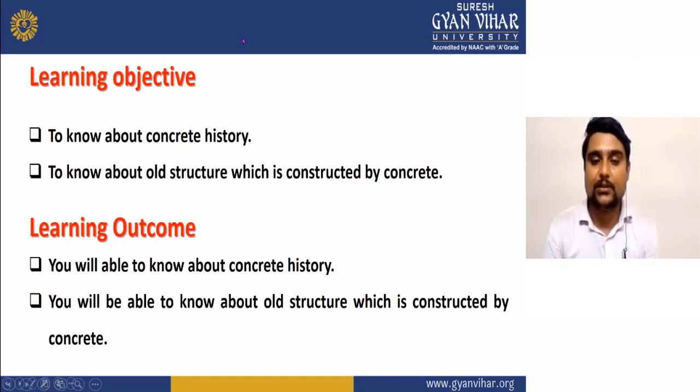First point is concrete. If you are doing any civil engineering course, like BTech or diploma in civil engineering, you should know the exact definition of concrete. The word concrete originated from the Latin word concretus, which means to grow together. Many times we also call something hard concrete.

And everyone knows concrete is the second largest consumed material in the world after water. People are consuming water, and after that the second consumed material is concrete. Anywhere you go, you will see concrete structures, because without concrete any kind of structure is not possible.

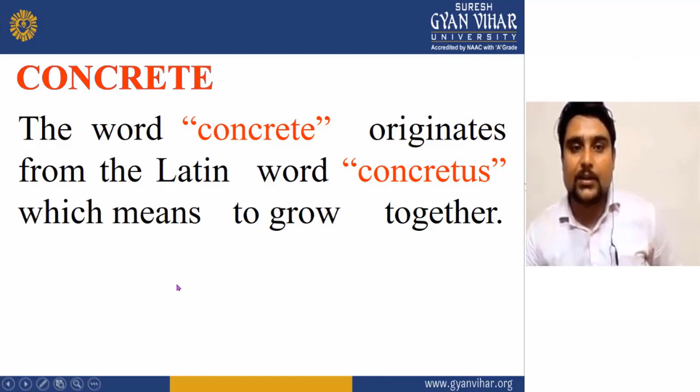Now we will see the exact definition of concrete. Concrete is a composite material in which a binding material is mixed with water with well-graded fine and coarse aggregate. What is the meaning of composite material? Concrete is prepared from other materials. When we mix sand, cement and aggregate together, we get concrete. That's why concrete is a composite material.

These materials are mixed through water. When you add water with the cement, sand and aggregate, you get concrete. What is the meaning of binding material? Binding material is the material which can bond coarse aggregate and fine aggregate together. Here we are using cement as the binding material.

That's why we say concrete is a composite material of binding material mixed in water with well-graded fine and coarse aggregate. As fine aggregate we are using sand, and as coarse aggregate we are using aggregate, and they bind together with the help of cement and water.

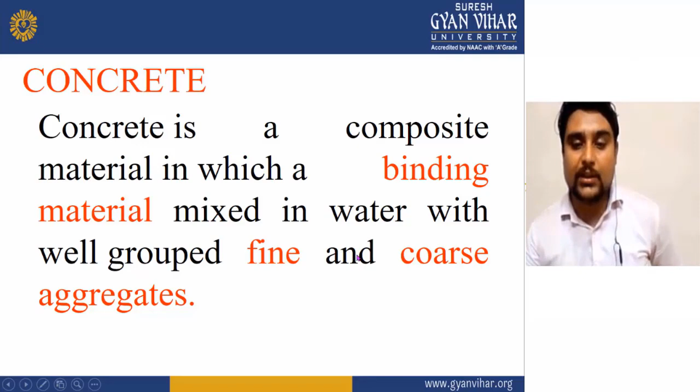What is the history of concrete? Before knowing anything, you should also know about the history of that thing, because history is very important. If anybody asks you what is the history of concrete, then you can easily answer it.

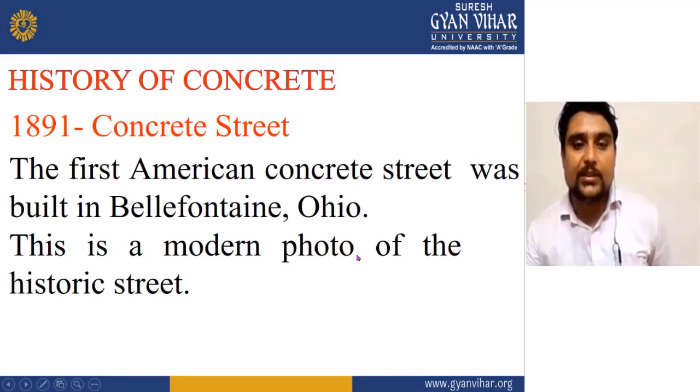The first American concrete street was built in Bellefontaine, Ohio. This is a modern photo of the historic street. In the next frame, you will see the picture of the first concrete street, which was built in 1891, and it is also called Concrete Street. It means concrete was first used in 1891, in Bellefontaine.

The first concrete home was built in 1908, as you can see here. Thomas Edison designed and built the first concrete home in Union, New Jersey. These homes still exist today. As you can see here, from 1908 we have been using concrete, and we built the first concrete home in Union, New Jersey. New Jersey is a state of the United States, as you all know. And these homes still exist today.

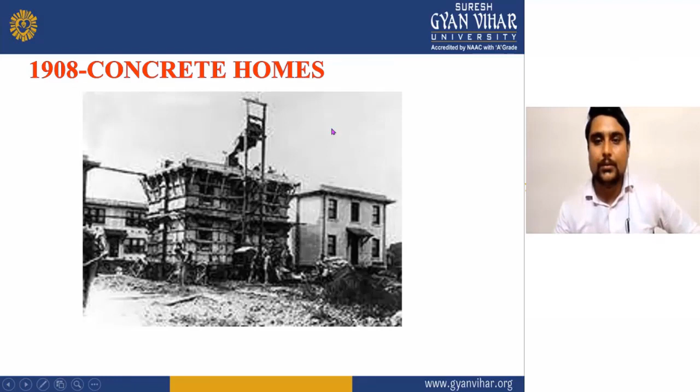And this is a very big thing, because it is more than 100 years, and those homes still exist. This is a very big thing. It means the life of concrete is very long. You can also see the picture of the homes which were built by Thomas Edison, as mentioned here, and this is the picture of that home.

Everyone has heard about the Hoover Dam. Hoover Dam is a very popular dam which everybody knows or has seen in the movies. In 1936, the Hoover Dam was built along the Colorado River, bordering Arizona and Nevada. It was the largest scale concrete project ever completed.

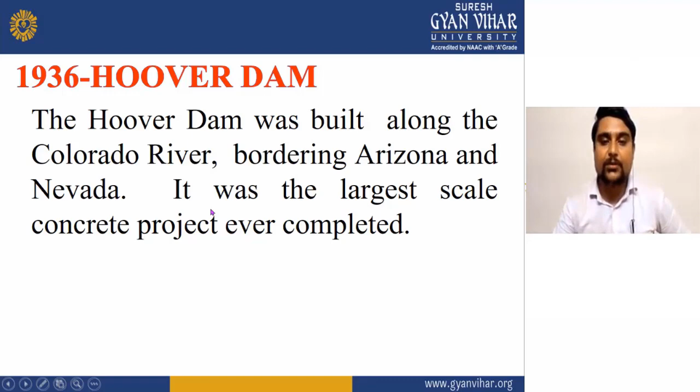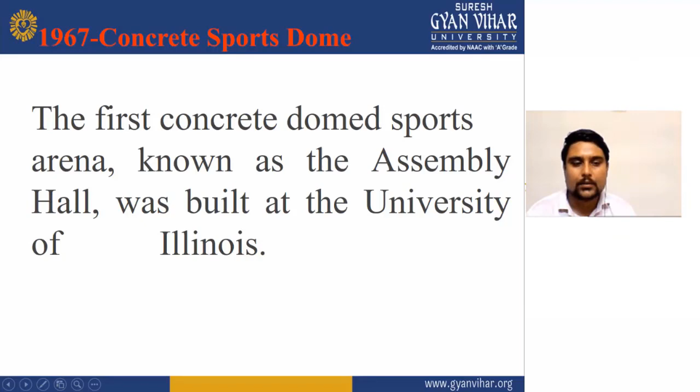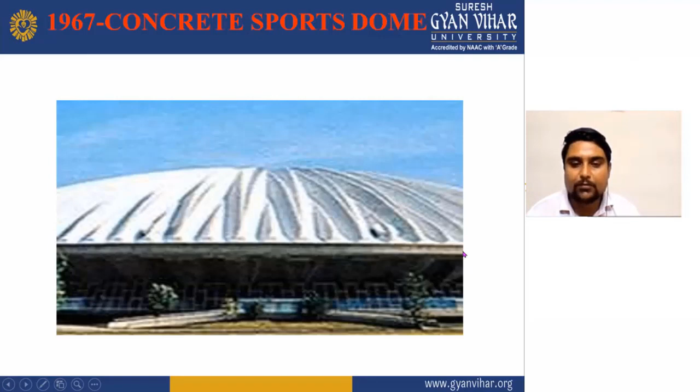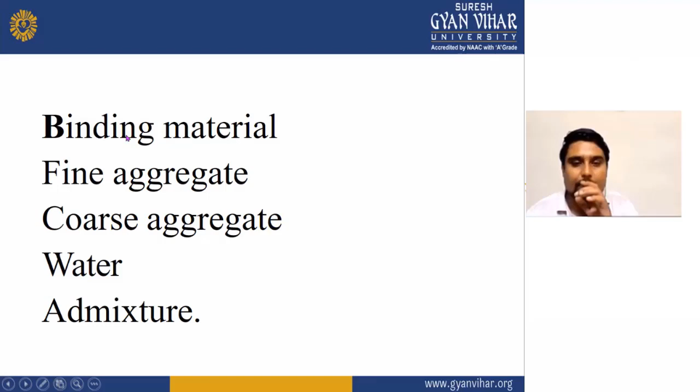This slide is about the ingredients of concrete. As you can see here, in concrete we use a binding material. The binding material may be lime or cement. What is the meaning of binding material? I told you earlier, binding material means something which can bind two things together. That's why that material is called binding material. In concrete, the binding material may be cement, and it may also be lime. In old times we were using lime as the binding material.

If you see an old structure like a fort, the stones are bound together with lime. So lime was also a binding material, and we did some invention, some research, and we modified lime into cement. The alternative to lime is cement. The others are fine aggregate, coarse aggregate, water and admixture. In fine aggregate we use fine material. We can use sand, cinder, and we can also use lime and fly ash.

These are the fine aggregates, meaning material whose size is small; that we call fine aggregate. Coarse aggregate means the size of the material is big; that's why we call it coarse aggregate. Then water and admixture. Admixture is a different thing. It is not necessary to add admixture to your concrete. What does admixture do? Admixture can modify the properties of concrete.

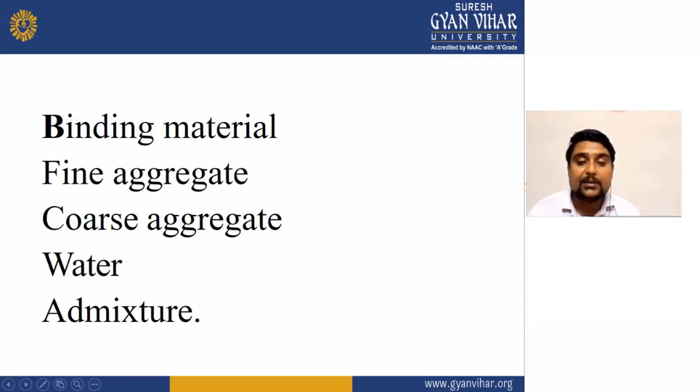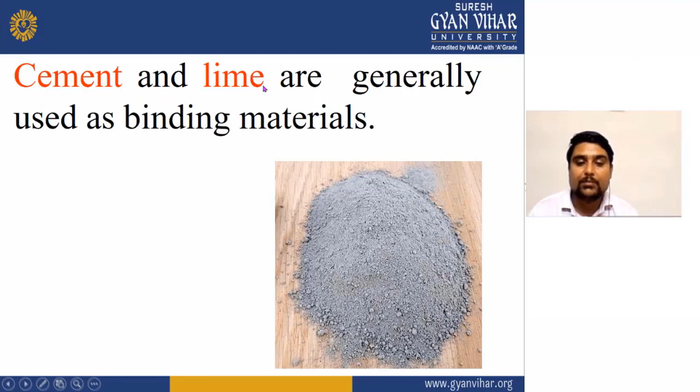Cement and lime are generally used as the binding material. Now you can see the picture of cement, and here also mentioned lime. Lime is also a binding material.

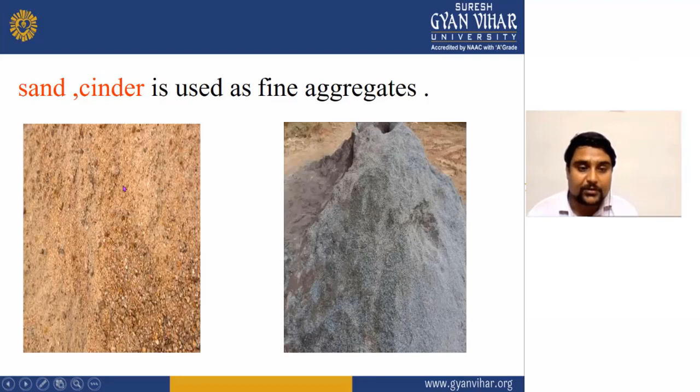Sand and cinder are used as fine aggregate. You can see here sand we are using also as fine aggregate, because the size of sand is very small. That's why we count it in the fine aggregate, we cannot count it in the coarse aggregate.

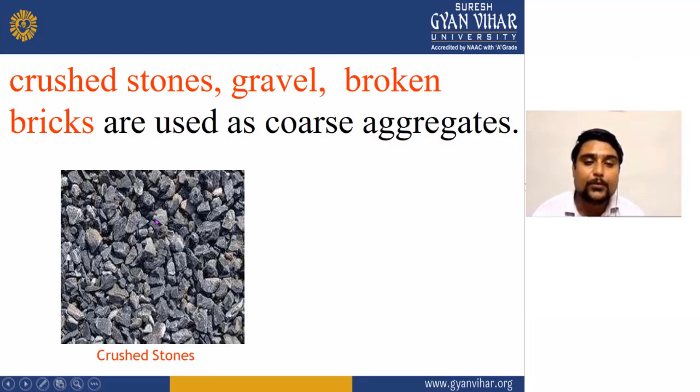What will be the coarse aggregate? As you can see in the picture, the size of these materials is bigger than fine aggregate, that's why we call it coarse aggregate. Crushed stones, gravels, broken bricks are used as the coarse aggregate. These are the pictures of the coarse aggregate, as you can see here.

Now we will see some properties of concrete. Freshly prepared concrete, till it has not set, is called wet concrete. Because when we mix cement, sand, water, and aggregate together, it will be in the form of liquid. It will be called wet concrete, as you can see here.

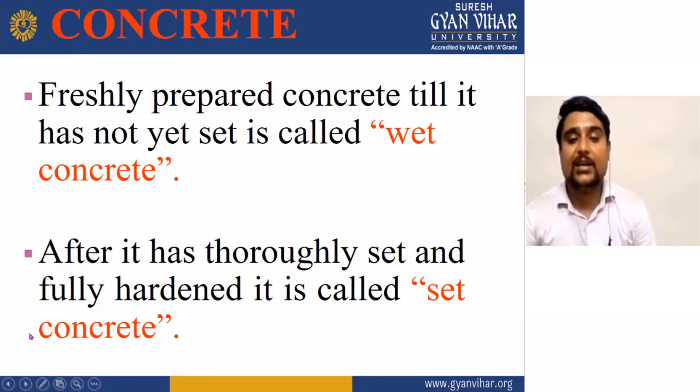Mixing of the concrete, as you know, is also a very important thing you should know about. Nowadays, a lot of people are using concrete, mixing concrete with the help of machine. That is called machine mixing.

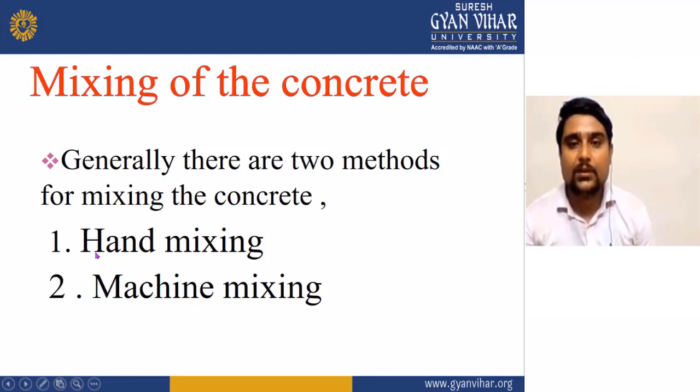There are two methods of mixing, as you can see here. In machine mixing, it will take less time. In hand mixing, it will take long time. The accuracy of material weighing is very fine with machine mixing, and the accuracy of material with hand mixing is not very good.

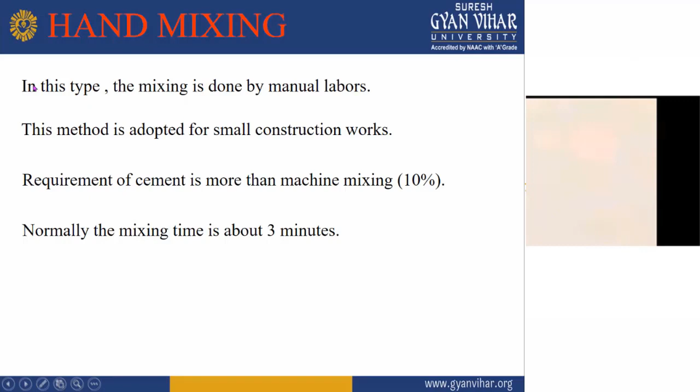Now we will see the hand mixing. In this type, the mixing is done by manual labor, as I told you earlier. This method is adopted for small construction work, meaning by using hand mixing you cannot do work on a very big structure, that's why you have to do it for small work.

There is also a requirement of cement that is more than machine mixing, approximately 10%. This is a very important thing which you need to know, many times in exams, MCQ exams, this question came: if you are mixing with machine versus mixing with hand, where do you have to use more cement? In hand mixing, you have to use more cement, more than 10% compared to machine mixing.

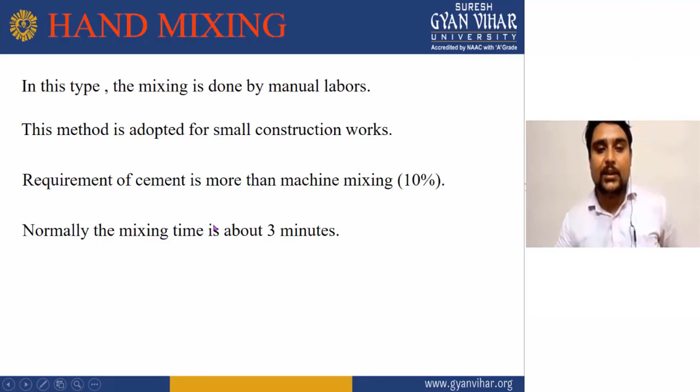Normally the mixing time is about 3 minutes. When you do the hand mixing, you have to finish your mixing within 3 minutes, otherwise your concrete will start being hardened. That's why you have to finish all the work within 3 minutes.

Construction of platform of bricks, lean concrete, or iron sheet, where you can use hand mixing. You can see here the construction of platform of bricks, lean concrete, or iron sheet.

Spread out sand evenly, spread cement on it, and mix it till the color mixing becomes uniform. Spread the mixture and spread coarse admixture, then mix it. During the mixing, the remaining water should be added in a continuation process. Time for the mix is generally 2 to 3 minutes.

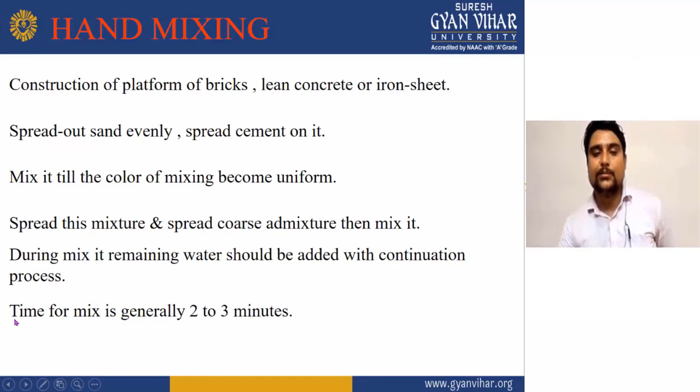Now we will see machine mixing. This is similar to hand mixing, only the mixing is carried out in a rotating drum. As you can see here, rotatory is a different thing and rotating drum is a different thing. As you can see here, we are using a rotating drum.

What we have to do is fill cement, sand, and water here, and then we get the concrete, as you can see here. First, you have to put the aggregate, then sand, then cement, and after that you have to put water in this drum, and it will rotate approximately 30 to 35 rounds, and then your concrete will be fully mixed. If you want to add an admixture, you can add it during the rotation of this drum.

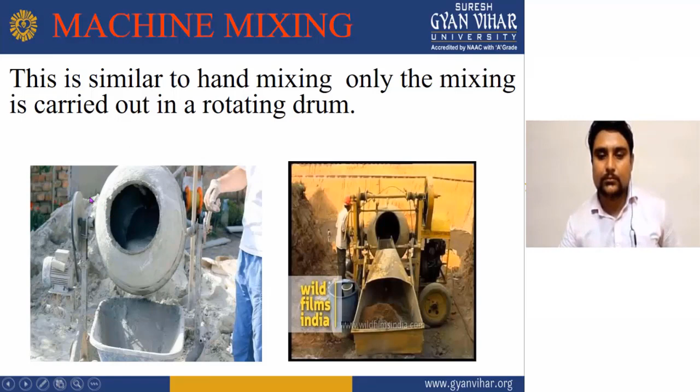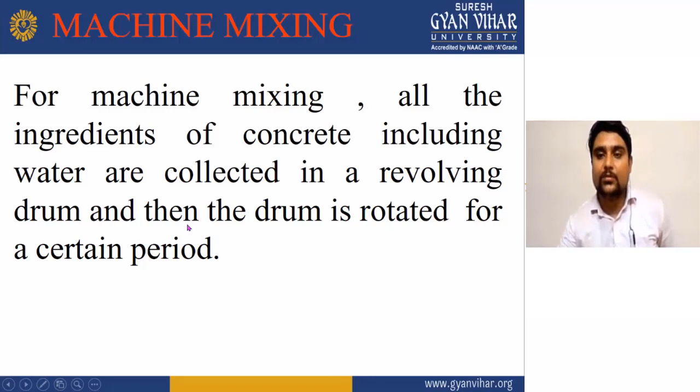Machine mixing: for machine mixing, all the ingredients of concrete including water are collected in a revolving drum, and the drum is rotated for a certain period. In machine mixing, there is also a ready mix concrete, which we call a ready mix plant, RMC plant.

Ready mix concrete is a type of concrete that is manufactured in a factory or batching plant according to the design, and then delivered to the work site by transit trucks. It is manufactured under computer controlled operation and transported and placed at the site of construction.

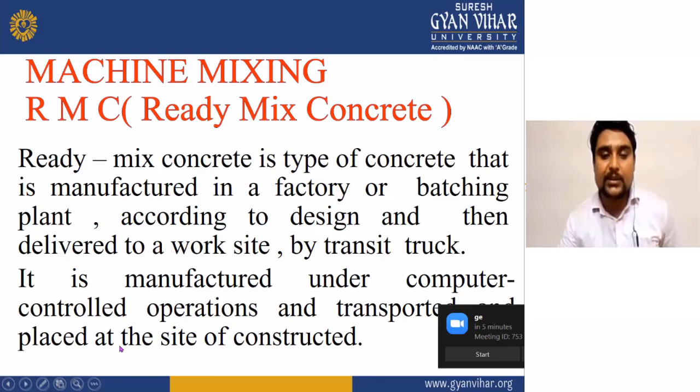What is the advantage? If you do one mixing by hand and one mixing by machine, definitely you will get a good result by machine mixing, because machine mixing will be done properly, as there will be a weighing machine also. When you put the material on it, it will calculate how much quantity of cement, how much quantity of sand, and how much quantity of water you have to use for your concrete. That's why it is better than hand mixing.

What will be the advantages of ready mix concrete? We will see here: better quality concrete is produced, storage space for basic material at the site is not required, and wastage of basic material is avoided.

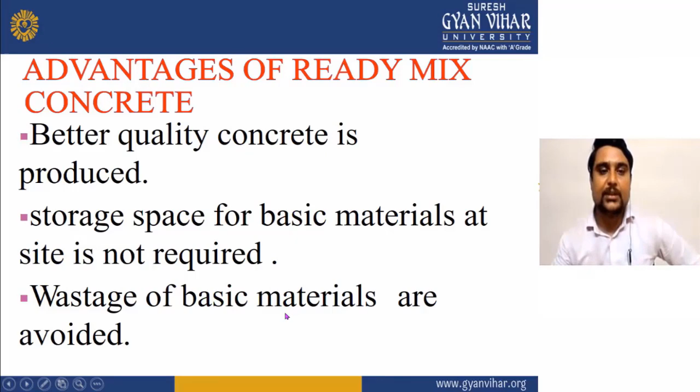After watching the video, I think you have got a very good idea about ready mix concrete. Now we will see the advantages of ready mix concrete. First, you will get better quality concrete which will be produced, and storage space for the basic material at the site is not required, meaning you do not need to worry about storing cement, sand, and aggregate. And wastage of basic material is avoided, meaning wastage will be very negligible, because all concrete will be mixed together and there will be no much time for putting cement on the site. That's why there are many advantages of ready mix concrete, as you can see here.

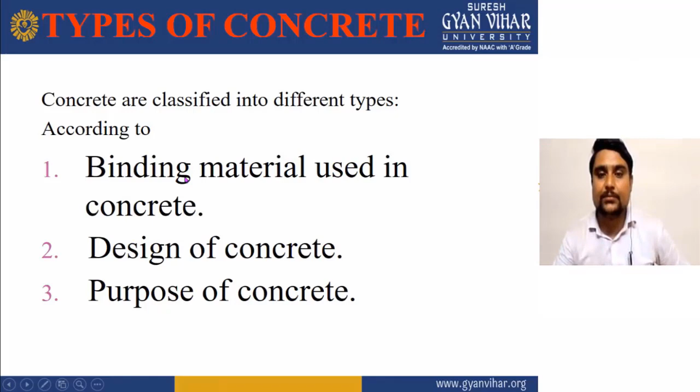First, we will see the classification according to the binding material. The first one is cement concrete and the second one is lime concrete. As I told you earlier, it depends on the binding material; we are using cement and lime also. That's why it is categorized into two parts: first due to cement and second due to lime.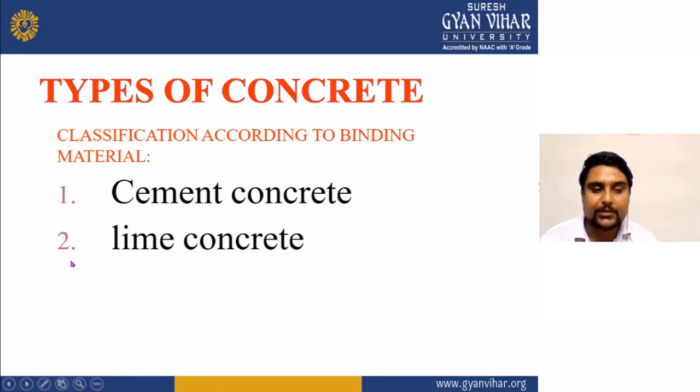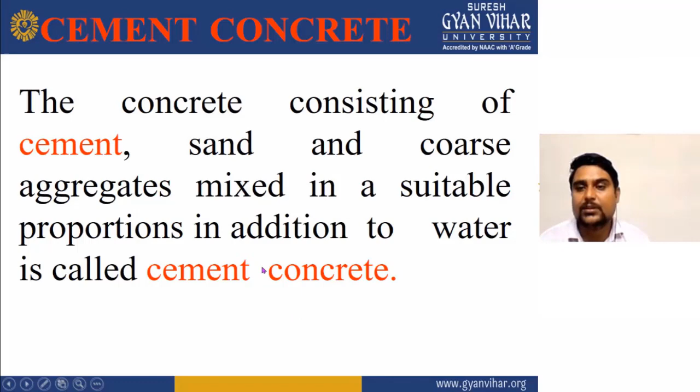Cement concrete consists of cement, sand, and coarse aggregate mixed in suitable proportion in addition to water, and this is called cement concrete. What we have to do is take the cement, sand, aggregate, and use a suitable quantity of water with these materials, and then we get the cement concrete. This cement concrete is generally used for the building of any construction activities.

Cement concrete is a type of concrete where cement is used as a binding material, sand as fine aggregate, and gravel or crushed stone as coarse aggregate. In lime concrete, we use lime in place of cement.

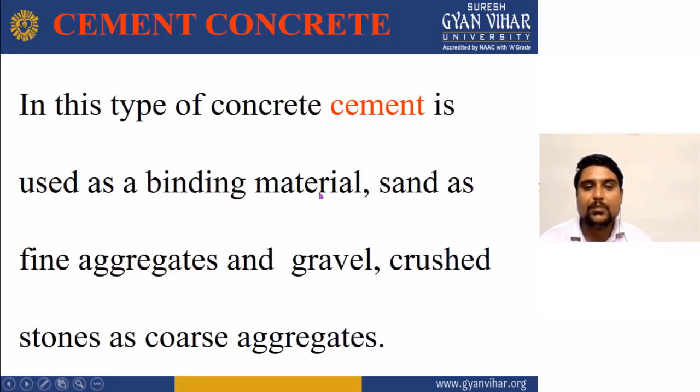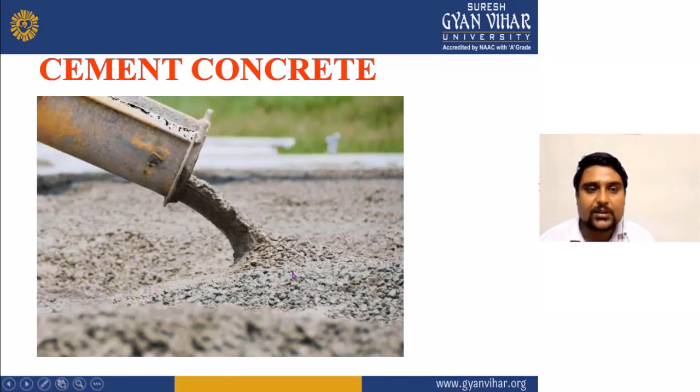As you can see in the photograph, cement concrete is prepared using cement as a binding material. Cement concrete is commonly used in buildings, roads, dams, and other important engineering work where strength and durability is of prime importance. Where you need good strength and good workability, you can use cement concrete, because the strength is not like other concretes. That's why we use cement concrete where we need more strength, more durability, and more lifespan of the structure.

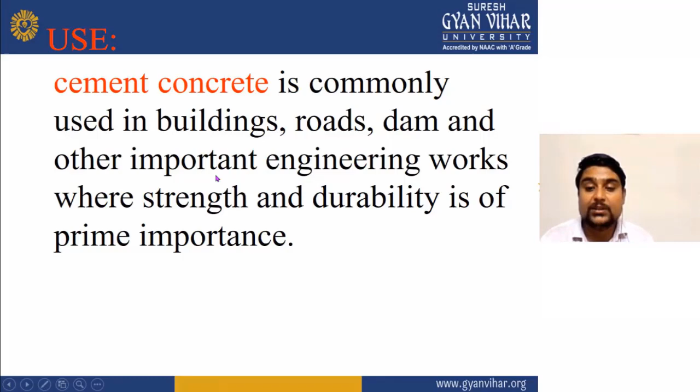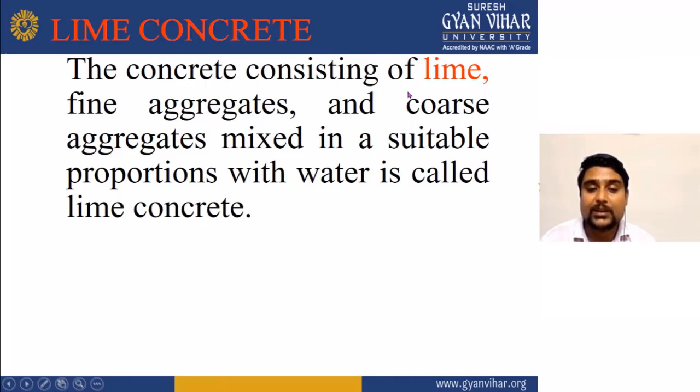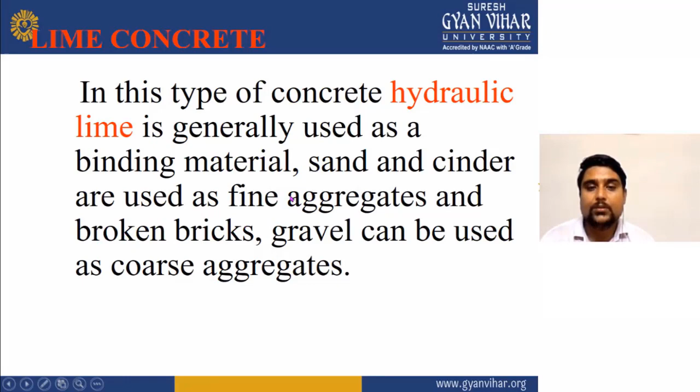Let's come to lime concrete. Concrete consisting of lime, fine aggregate, and coarse aggregate mixed in suitable proportion with water is called lime concrete. Here lime is highlighted in red color, meaning we are using lime in place of cement. In this type of concrete, hydraulic lime is generally used as a binding material. Sand and cinder are used as fine aggregate, and broken bricks or gravel can be used as coarse aggregate.

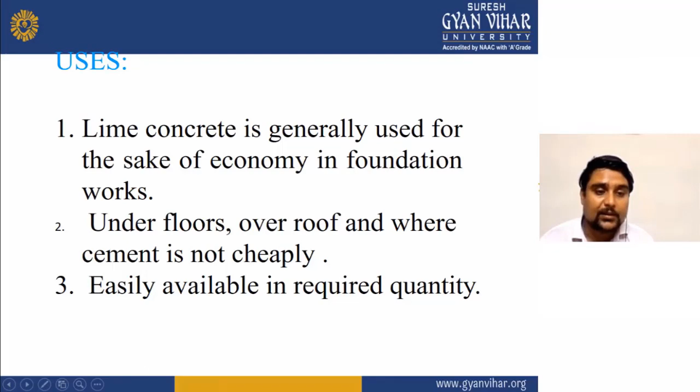What are the uses of lime concrete? Lime concrete is generally used for the sake of economy in foundation work, under floors, over roofs, and where cement is not cheaply or easily available in the required quantity. Meaning if you want to make your structure economical, there you can use lime concrete. This is the photograph of lime concrete.

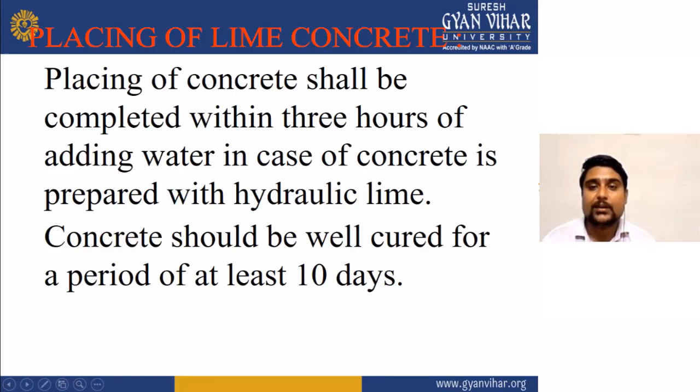One important thing: placing of lime concrete shall be completed within 3 hours of adding water. In case the concrete is prepared with hydraulic lime, the concrete should be well cured for a period of at least 10 days. Now we will see MCQ questions on concrete.

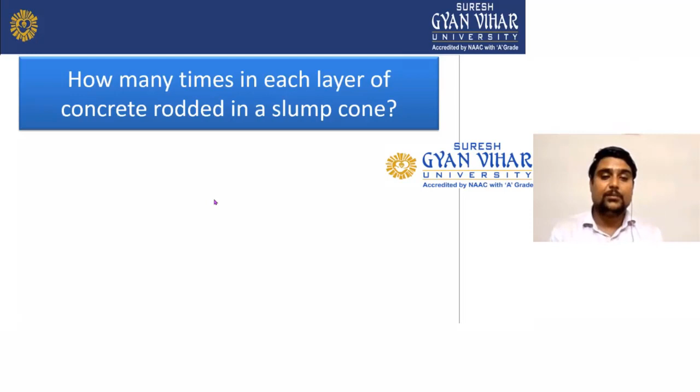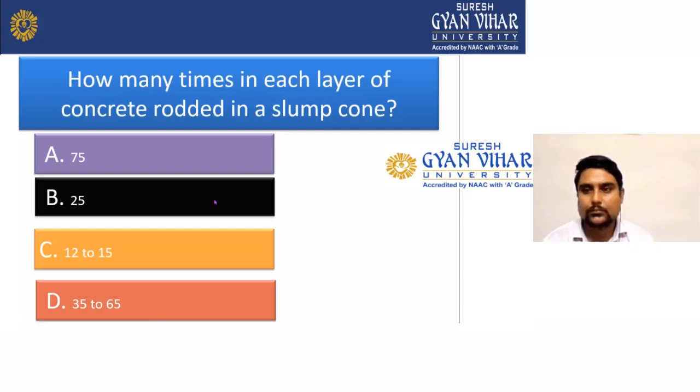First question: how many times is each layer of concrete rodded in the slump cone? There are four options: A is 75 times, B is 25 times, C is 12 to 15 times, and D is 35 to 65 times. The right answer will be 25 times.

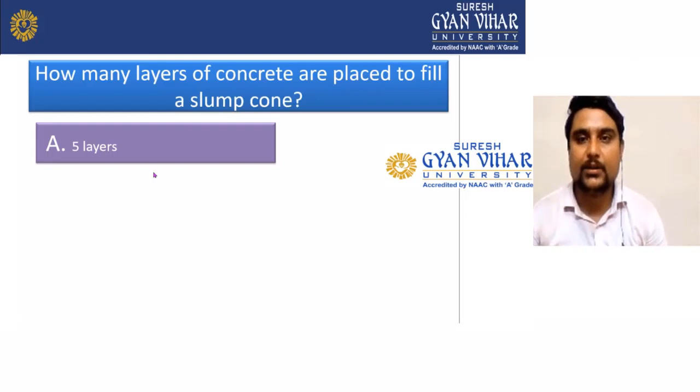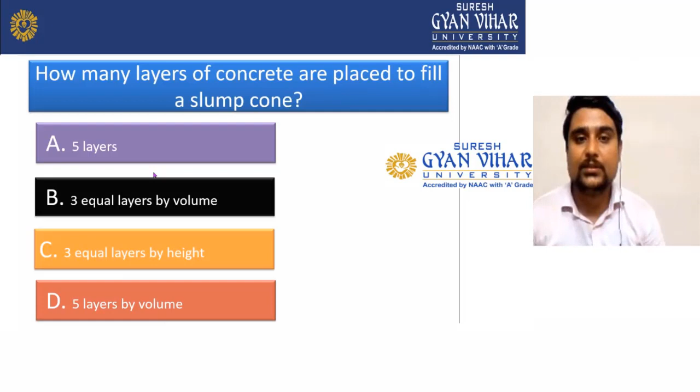Second question: how many layers of concrete are placed to fill the slump cone? First option is 5 layers, second is 3 equal layers by volume, third is 3 equal layers by height, and fourth is 5 layers by volume. The right answer will be B.

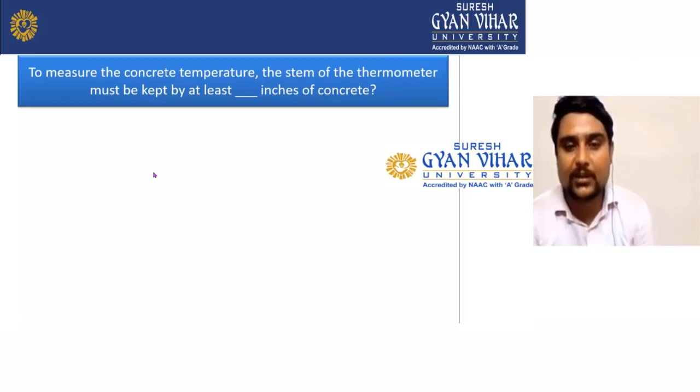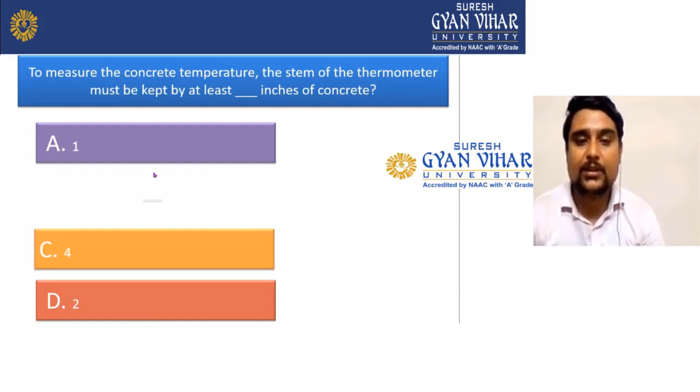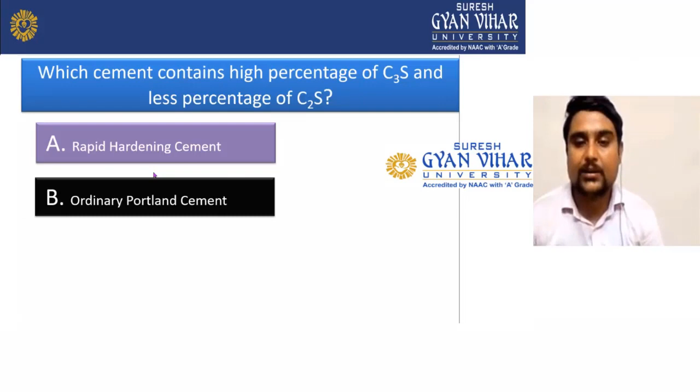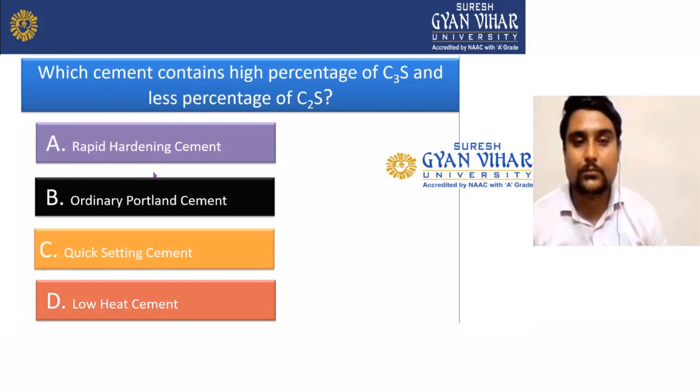Which cement contains a high percentage of C3S and less percentage of C2S? Options: first is rapid hardening cement, second is ordinary Portland cement, third is quick setting cement, and fourth is low heat cement. Rapid hardening cement will be the right answer. In rapid hardening cement, there is a high percentage of C3S, called tricalcium silicate, and less percentage of dicalcium silicate, compared to ordinary Portland cement.

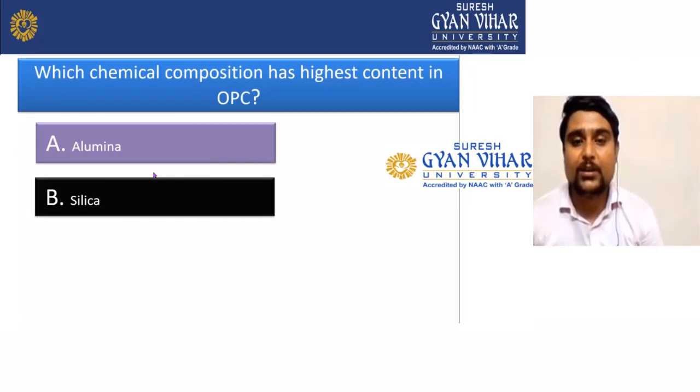Next question: which chemical composition has the highest content in OPC? Options are alumina, silica, lime, and iron oxide. The question is asking which chemical composition has the highest content in OPC, meaning which component will be more in your OPC. Let's see.

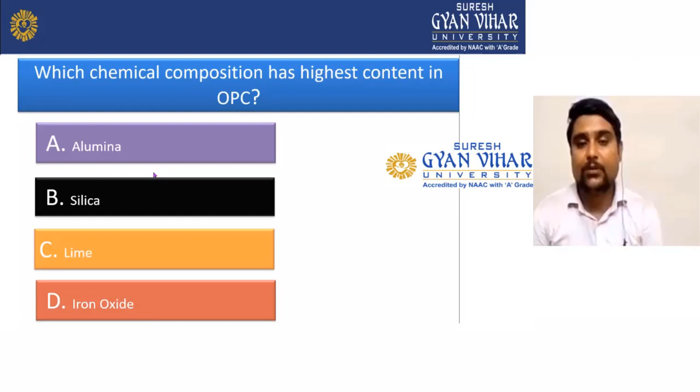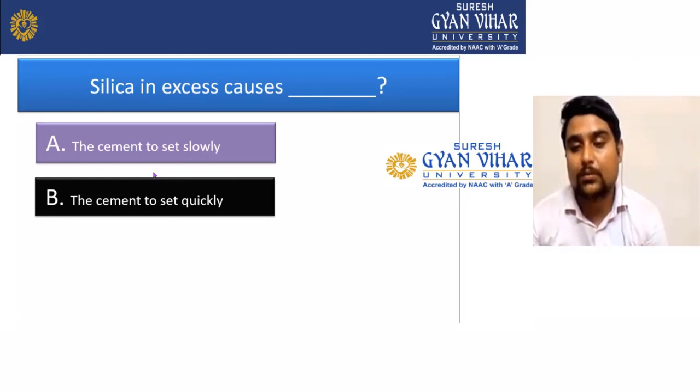Right answer will be here lime. As you can see here, lime is your right answer. Come on the next question. Silica in excess causes? If silica will be in more quantity, what will happen in your cement? See, the cement will set slowly. Second option is the cement to set quickly. Fourth option is the cement to expand.

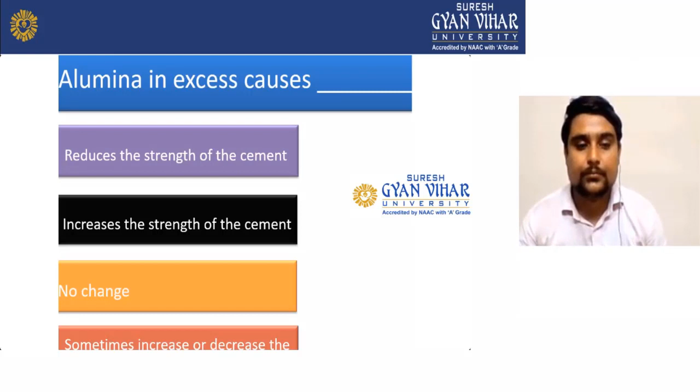In the next question, it is asking alumina in excess causes. What will happen if alumina will be in excess quantity? First, reduce the strength of the cement. Second option will be increase the strength of the cement. C option is no change, and D option is sometimes increase or decrease the strength of the cement. And here answer A will be your right answer. Reduce the strength of a cement. Okay.

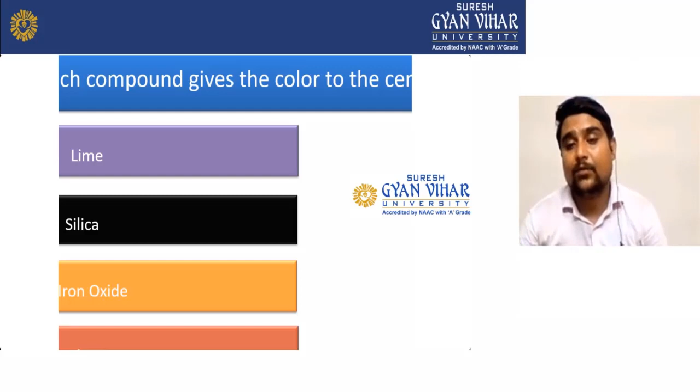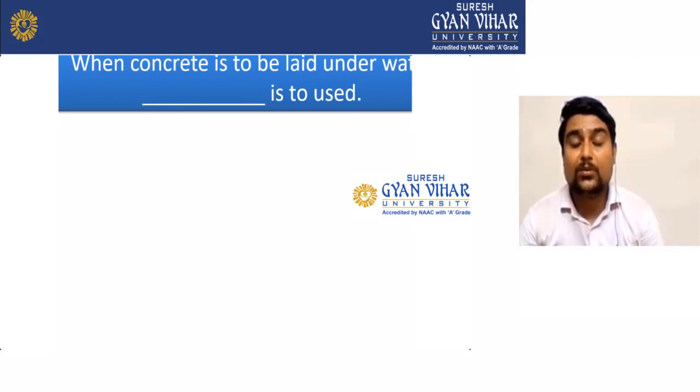When concrete is laid under water, it is to use rapid hardening cement, ordinary Portland cement, quick setting cement, and low heat cement. Which cement we have to use underwater? This is the question. And here we have to use quick setting cement, because quick setting takes very less time for the hardening. That's why we always use quick setting cement in underwater construction.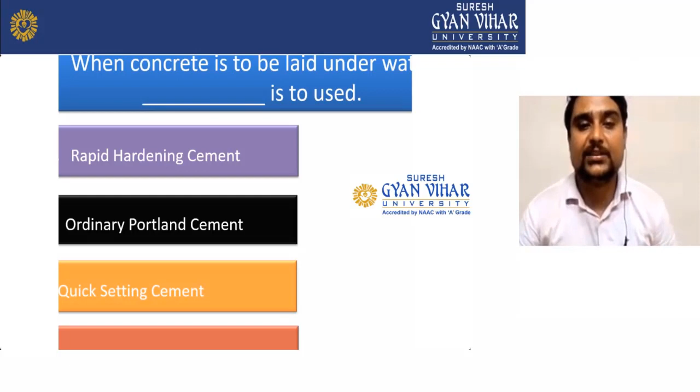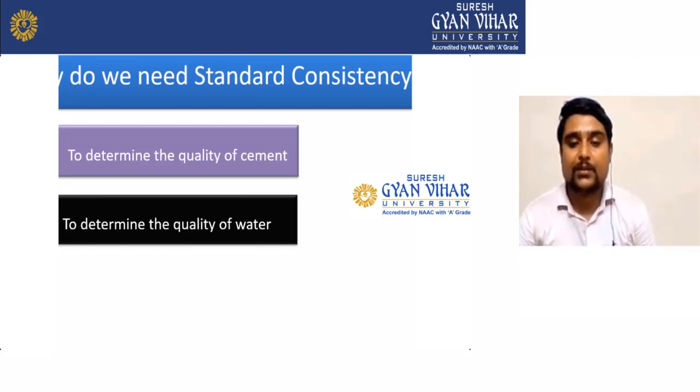Why do we need standard consistency test? Why we perform the standard consistency test? Here you can see, to determine the quality of the cement. Second option is to determine the quantity of the water. This is not quality, this is quantity. To determine the quality of the mixed concrete. And fourth answer is to determine the strength of the concrete block. Here it will be to determine the quantity of the water, because with the help of standard consistency test we,

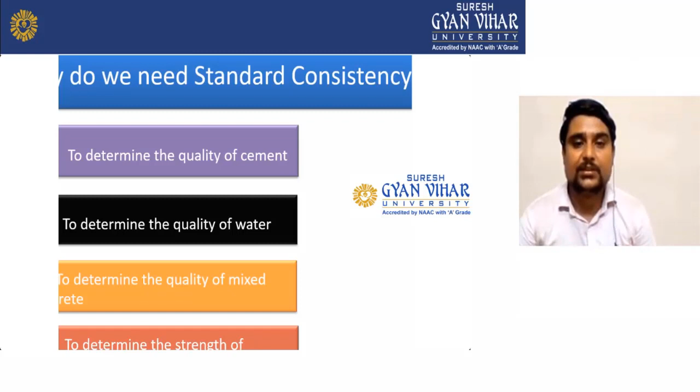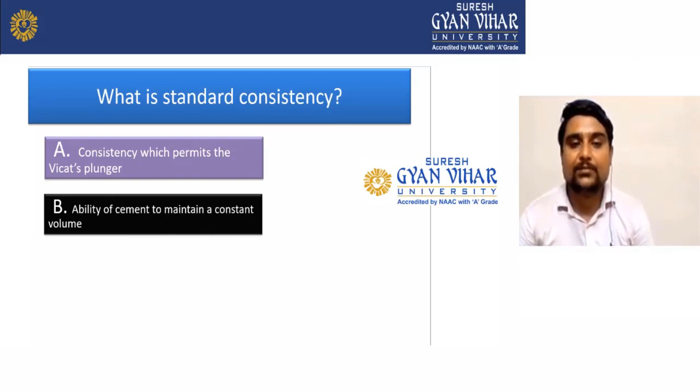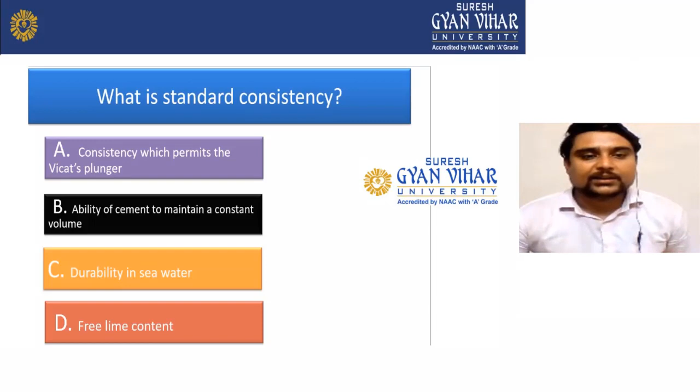What is standard consistency? You have to tell here what is the standard consistency. It is consistency which permits the Vicat plunger, ability of cement to maintain constant volume, durability in seawater, and fourth one is free lime content. It is asking how you will define the consistency of a cement, and sometimes we also call it standard consistency. Right answer will be consistency which permits the Vicat plunger to penetrate from 33 to 35 mm from the top of the mold. That will be your standard consistency. Let's see the next question.

How many molds are required for the compression strength of cement? Here is given 1, 2, 3, and last one is 4. Right answer will be 3, because we took 3 molds and tested them on the CTM machine, and after 3 cube testing, we took the average strength. How will you find the average strength? We find the mean of it. Suppose one cube is giving 22 kilonewton, second one is giving 20 kilonewton, and third one is giving 30 kilonewton. We will add 3 values and divide by 3. Then we get the compression strength of a cement, also called mean strength of a cement cube. So here right answer will be 3.

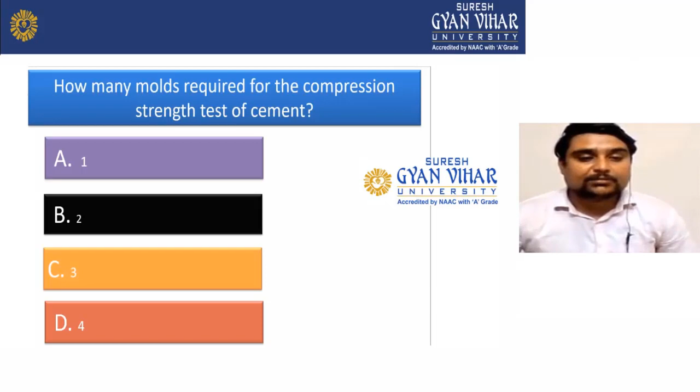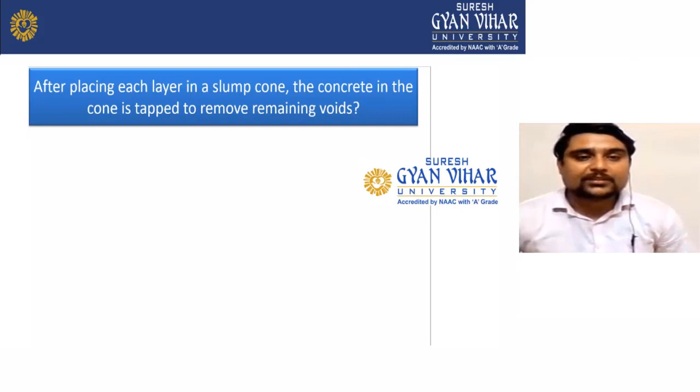After placing each layer in the slump cone, the concrete in the cone is tamped to remove the remaining voids. Will the sentence be true or false? In this question it is saying, after placing in the slump cone, we have to tamp the concrete. Then what will be the purpose of the tamping? It is written here, remove remaining voids, means air voids. Yes, this sentence is right, because we do tamping just to remove the air voids, so that our concrete is compacted properly.

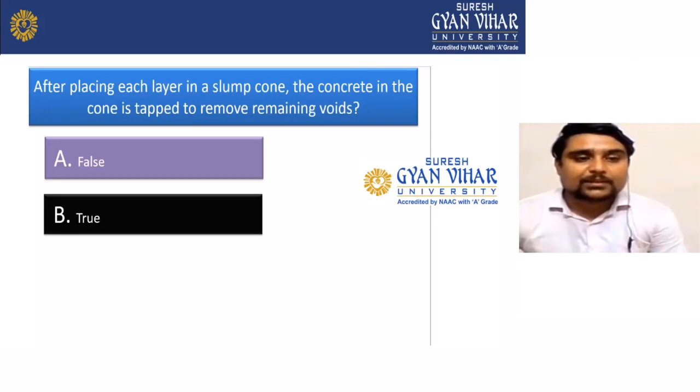This was all about the MCQs, and these MCQs will come in your government exams and in your weekly test. If you look at the previous year questions of SSC or GATE, you will find some questions from there. And this is very important.

If you write these things in your notebook, you can also prepare a question bank, which will help you a lot after the completion of your BTech. When you prepare for government exams, these MCQs will help you a lot.

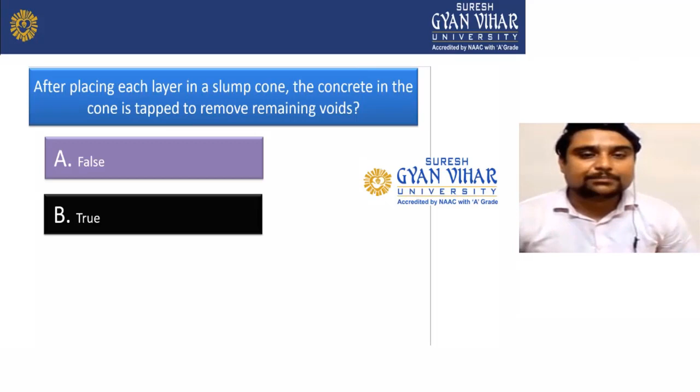I am telling you about the reference books for concrete technology. The first is Concrete Technology by M.L. Gambhir, Tata McGraw Hill, New Delhi. This is your reference book. The second one is Properties of Concrete by A.M. Neville. There is also a new edition which you can purchase from the market.

These two are the reference books which I recommend for your study. These are very good books. If you follow them, you will learn a lot.